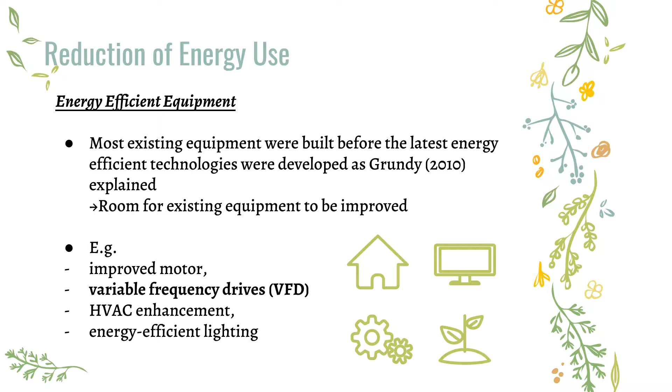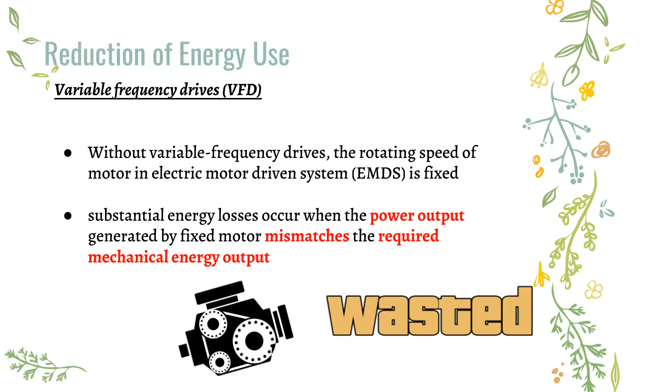There are numerous electric motor driven systems in existing buildings, for example in the cooling system, and substantial energy losses occur when the power output cannot match the energy requirements. This is because without VFD, we cannot control the rotating speed of the motor. But with VFD, we can control the frequency of power supply, meaning the motor speed can be controlled, lowering the energy requirement for EMDS and reducing energy loss in the system.

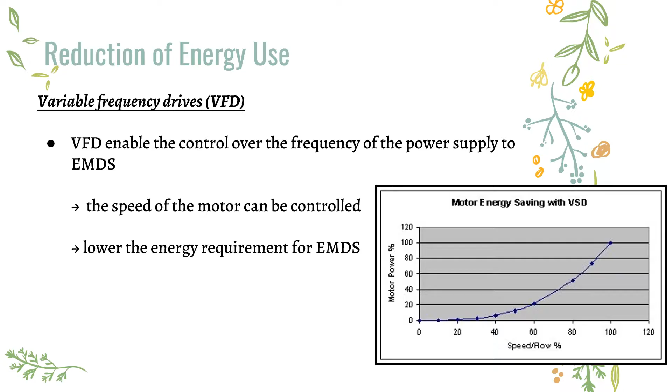We may replace traditional light bulbs with LED in existing buildings because they consume 42% less energy than existing light bulb types. Also, they have a longer lifespan, meaning less waste or pollution will be produced during disposal. This is beneficial to the greening of existing buildings.

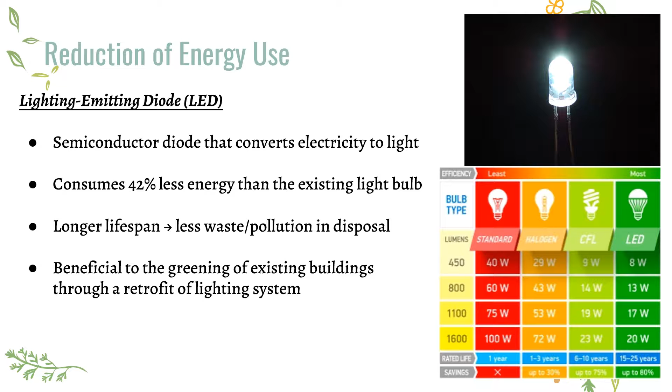Deep water cooling system can reduce electricity use in air conditioning. Its fundamental concept is using cool seawater to provide cooling energy to a heat exchanger, providing chilled water to cool buildings. It replaces the need for chillers at the customer's site, and cuts off the large amount of electricity needed to support chillers for air conditioning.

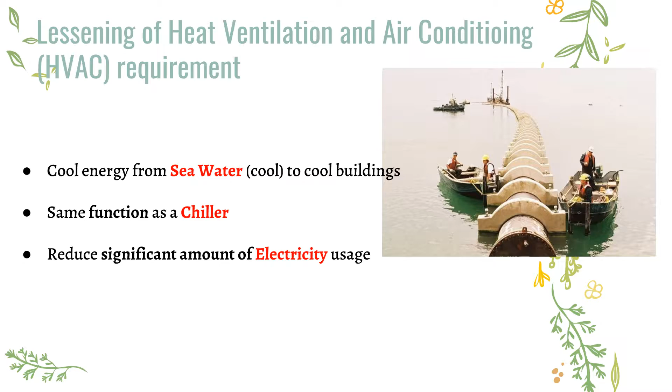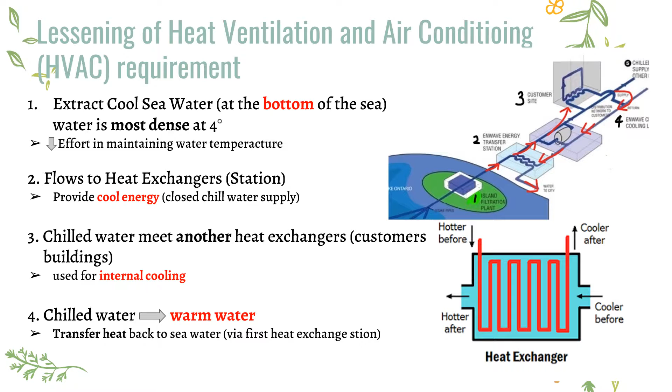Thirdly, the chilled water flows out and meets another heat exchanger at the customer's building, providing chilled water for their internal cooling system. Fourthly, after receiving heat from the heat exchangers, the chilled water turns into warm water. It then goes back to the first heat exchange station to transfer the consumed heat back to the cool seawater, and the cycle repeats.

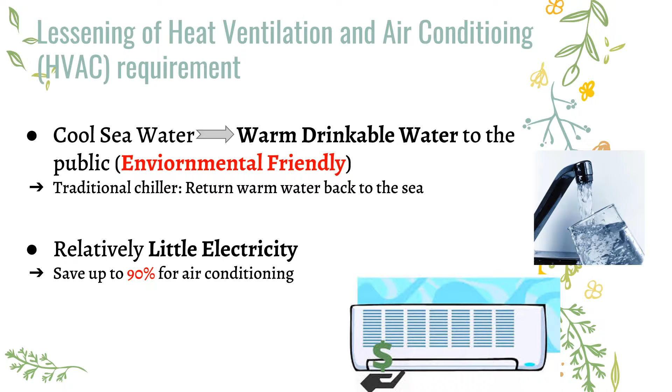The cool seawater becomes warm water after receiving heat from the first heat exchanger, and unlike traditional chiller plants that transfer warmed water back to the sea, this warm water is supplied to the public as drinking water after additional filtration, making the whole system environmentally friendly. It uses relatively little electricity compared to chillers and can save up to 90% of electricity used for air conditioning. Next, I will talk about the utilization of water resources.

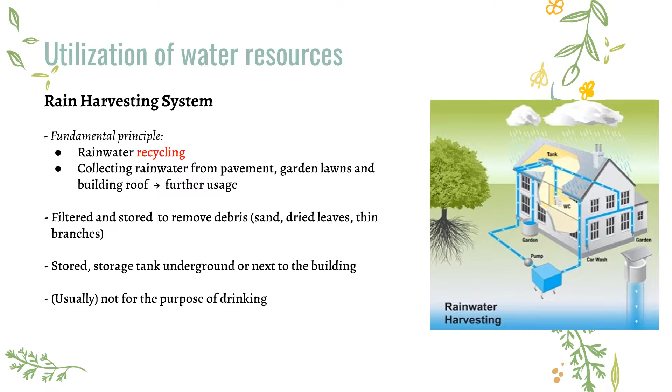The fundamental principle of rain harvesting system is to recycle rainwater. It collects rainwater from pavement, garden lawns, and building roofs for further usage like toilet flushing. The rainwater is filtered and stored to remove debris like sand, dry leaves, and thin branches. It is not usually for drinking, but for other purposes like toilet flushing.

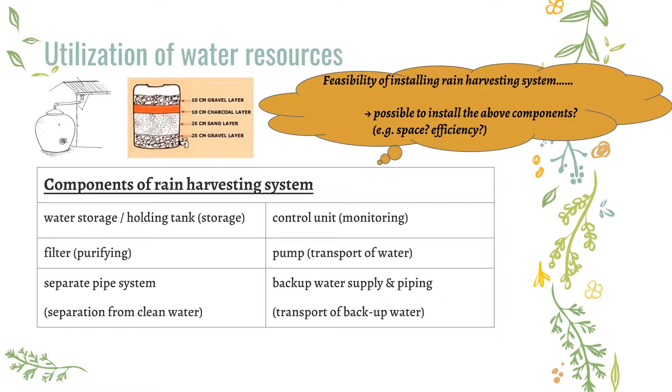There are some green benefits to the building. The first is it has a high level of water saving efficiency, like when rainwater is used for toilet flushing, it can save cost. Also, the pumping cost will be reduced if we adopt a gravity-based design, as the harvested rainwater is transferred by gravity.

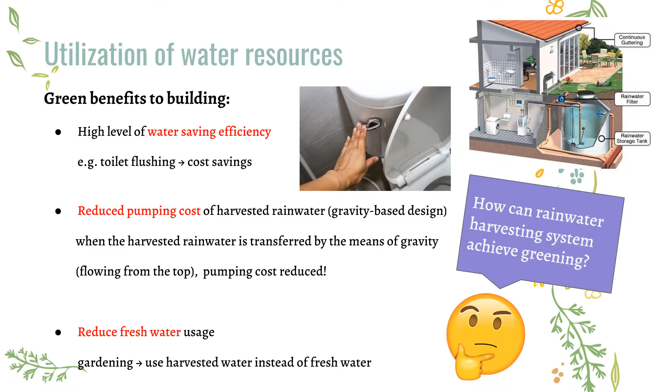Most importantly, it can reduce freshwater usage. For gardening, we can use harvested rainwater instead of fresh water for further usage.

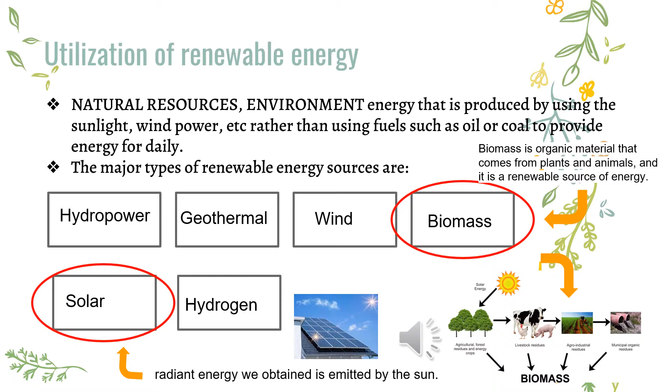Now we're going to talk about the utilization of renewable energy, which is natural resources and environmental energy provided by using sunlight and wind power, rather than using fuels such as oil and coal to provide energy for daily use. We mainly focus on biomass and solar energy from three dimensions: introduction, technologies, and disadvantages and advantages.

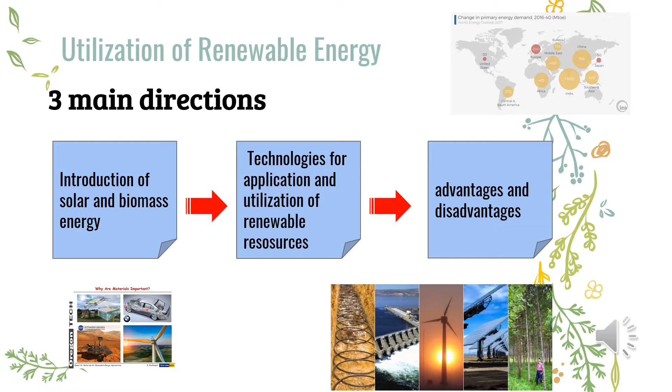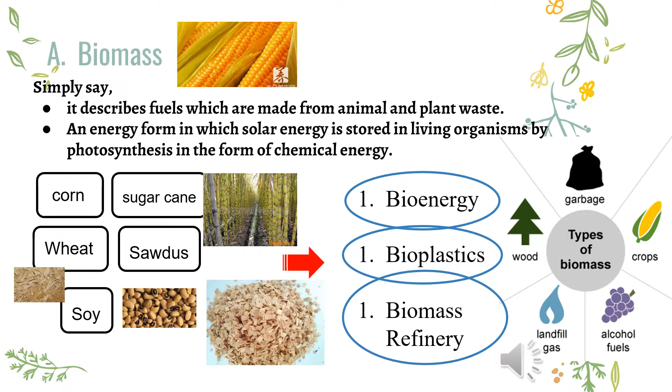Biomass describes fuels made from animal and plant waste. It's an energy form in which energy is stored in living organisms by photosynthesis in the form of chemical energy.

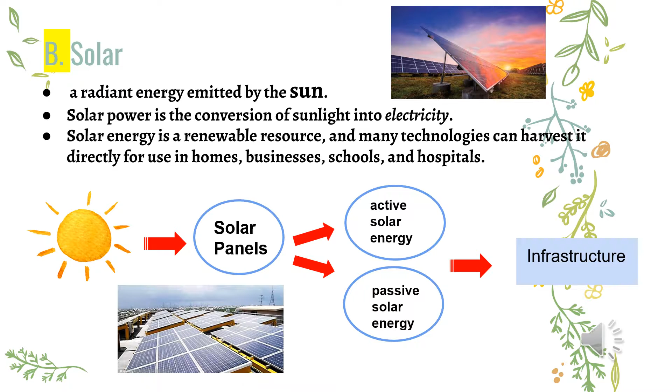Solar energy is radiant energy emitted by the sun. It's the conversion of sunlight into electricity by active and passive ways for use in homes, schools, hospitals, and other infrastructure.

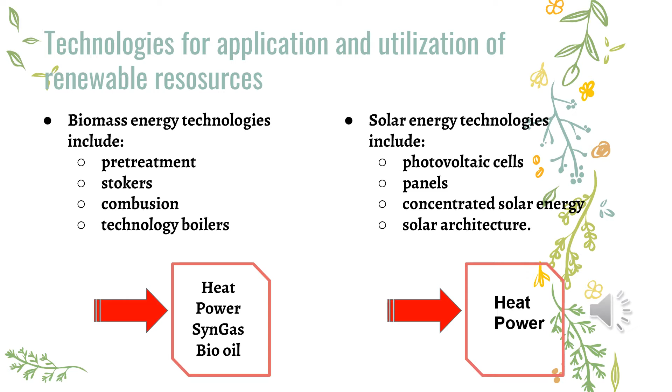These are some technologies applied in existing buildings to produce biomass and solar energy.

Festival Walk is a great example of how an existing building can be improved through the use of different technologies. It has received a platinum rating under the BEAM Plus existing building schemes, the top rating under the scheme, meaning it has great improvement in energy performance.

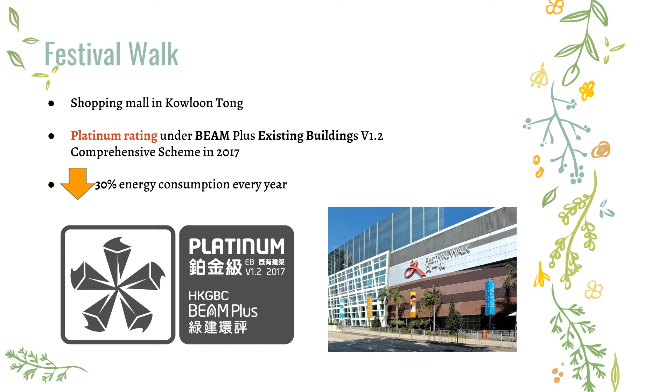The Swire Properties management team has utilized different energy equipment to reduce energy consumption in the buildings. For example, it uses VFD in air handling units and ventilation fans, consequently reducing energy use by 450 million watt-hours.

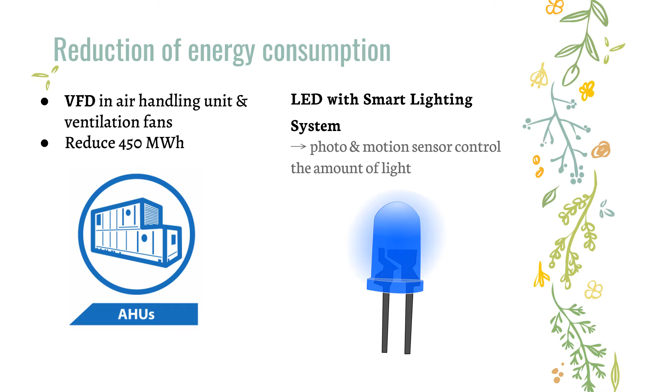Also, it installed LED with a smart lighting system. The photo and motion sensor control in the system controls the amount of light energy given out so that unnecessary energy loss can be reduced.

The management team has also installed a green roof, an automated sunshade shelter, and a reflective glass curtain wall in the buildings. These can absorb and reflect heat energy from the sun so that the cooling load of the building is reduced.

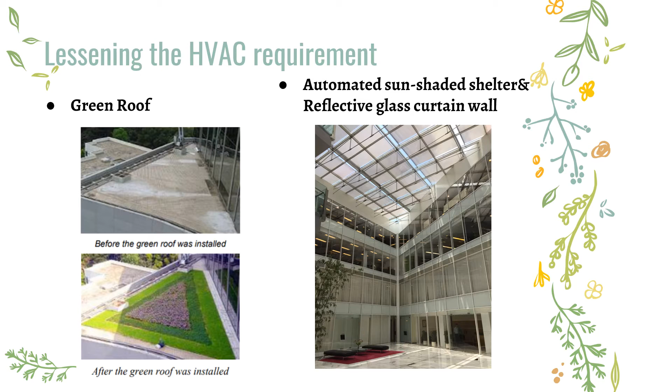Festival Walk has utilized water resources wisely. They installed water-efficient taps and recycled water from the cooling tower and sprinkler system, and these approaches help reduce the use of water.

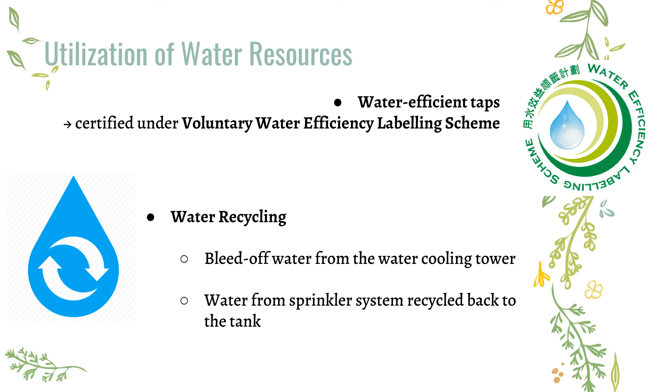To conclude, it's possible for us to use different technologies to improve the greening of existing buildings, and Festival Walk is a good example of how we can implement these technologies in Hong Kong.